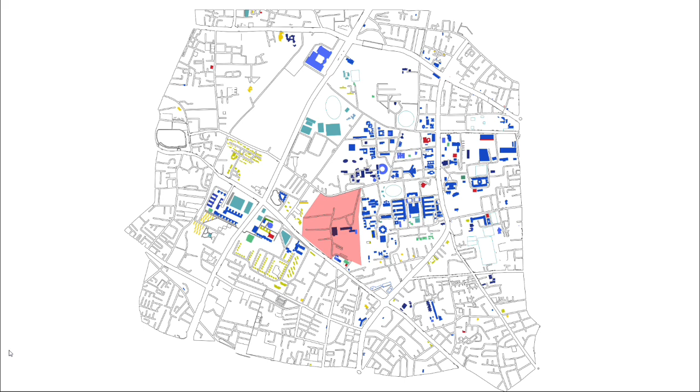Activity matrix and a general study of major institutes and universities in Ahmedabad revealed their interlinked history with the evolution of the city itself. Each of these institutions played a major role to develop an academic groundwork for their respective subjects and pave the way to the development of Ahmedabad as one of the leading hubs of higher education in

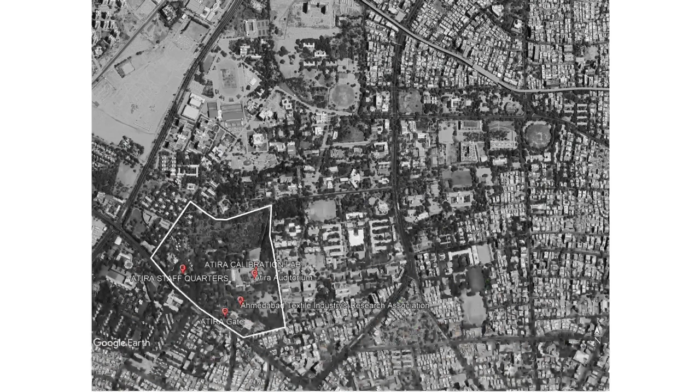India. National institutes like IIMA, NID, and those established by AES, and other institutes like GLS, St. Xavier's College, and PRL, all had significant historical contributions, which in the recent years, scholars and historians have started investigating.

But to access this essential database, a lack of formal archive program of institutional archives within their framework has come to light. While some institutions do have formal archives within the campus, others have an off campus establishment. The rest either have informal archives as a subset of their libraries or currently do not have an archive

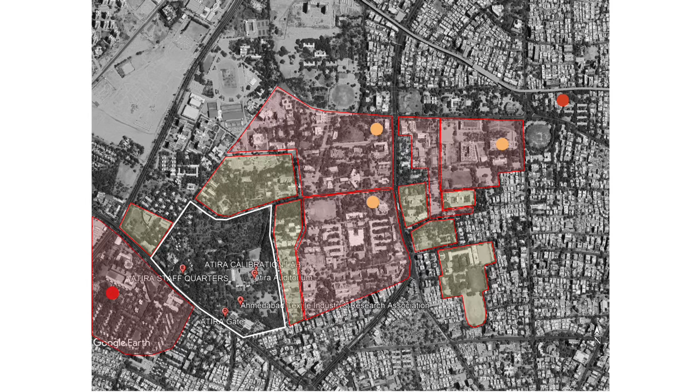program. Addressing this lack of archives and institutional archives as a critical program that records each of the academic achievements and contributions, the University Consortium Archives is proposed. It provides independent archival space to the various institutions with a larger shared space within the University Consortium Park.

This shared nature of the spaces and facilities further promotes investigation into their collective shared histories, forming a larger historical academic landscape of Ahmedabad. This allows us to further understand how Ahmedabad evolved from the post colonial nation building efforts all the way to what it is today.

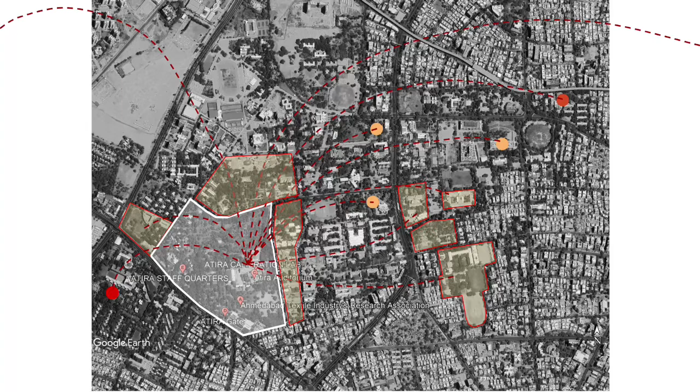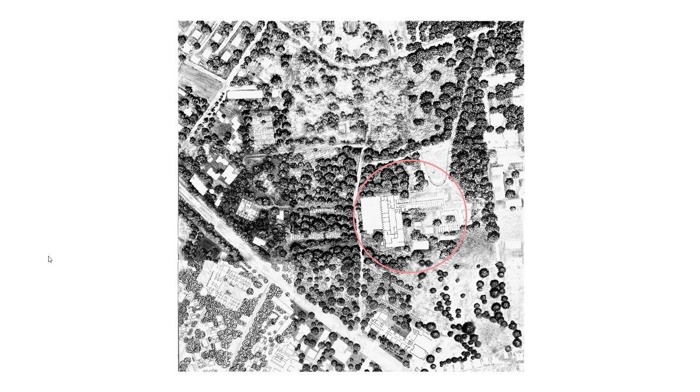ATIRA. ATIRA was conceived as one of such post-colonial institutions in an effort to strengthen the booming Ahmedabad textile industry. Located at the heart of the campus, the ATIRA complex, completed by Achyut Kanvinde, was designed as a modern icon. Influenced by the Bauhaus and the international style, the original complex is made of pure rectangular forms like objects on

a huge site. Playing with these forms, the facade from the northern approach expresses the frame system and horizontal strip windows to break the scale, with fins on the western facade responding to the harsh climate of Ahmedabad.

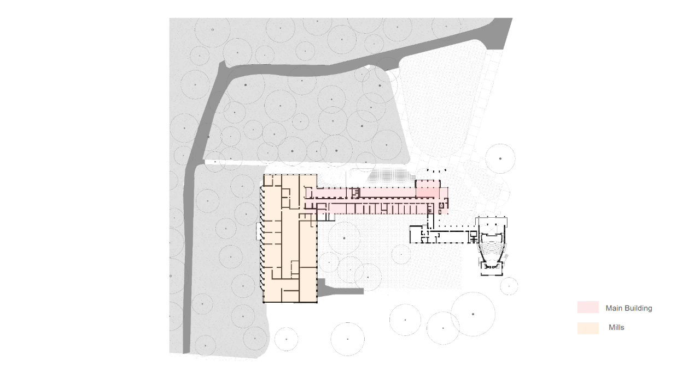The original plan of the ATIRA complex includes three major blocks. The main building with the formal reception to the complex, the mills which house the large machinery for the research institute, and the auditorium with a separate access connected to the main building by the canteen.

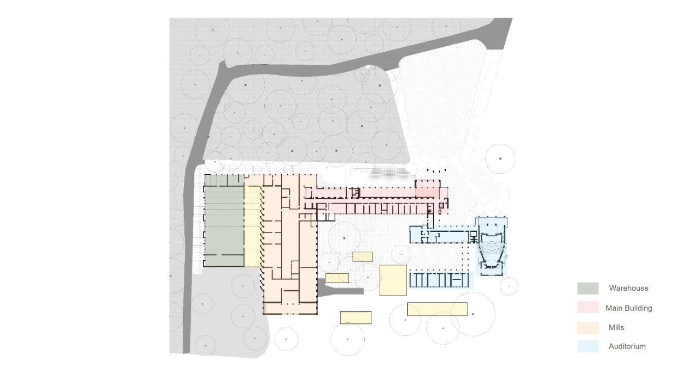An additional structure for the labs and an extension bay for the mills was subsequently added. With time, a warehouse was added as an extension to the mills. Additional lightweight structures have been added with no regard to the original order to meet growing requirements of the institute.

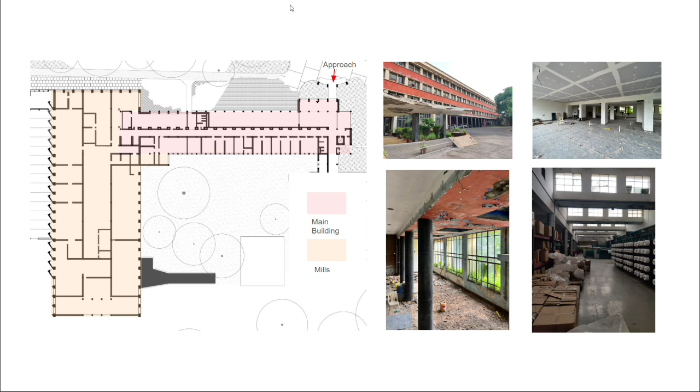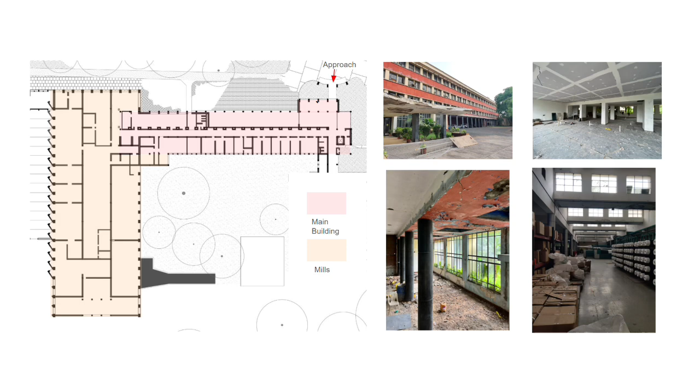Among these structures, the RCC frame structure of the main building and the mills allow flexibility to play with larger connected spans that can cater to the massive space requirements of the UCA. Archives of different natures can be housed within the 22 feet wide grid of the main building and the 12 feet grid of the mills. The nature of this proposed University Consortium Archives further perfectly complements the historic significance of the modernist structure.

The warehouse, with the 24-meter spanning truss roof, is repurposed as an exhibition space that allows for flexible spaces, allowing a periodic dissemination of the curated institutional history stored in the archives, along with various exhibitions from other programs within the University Consortium Park.

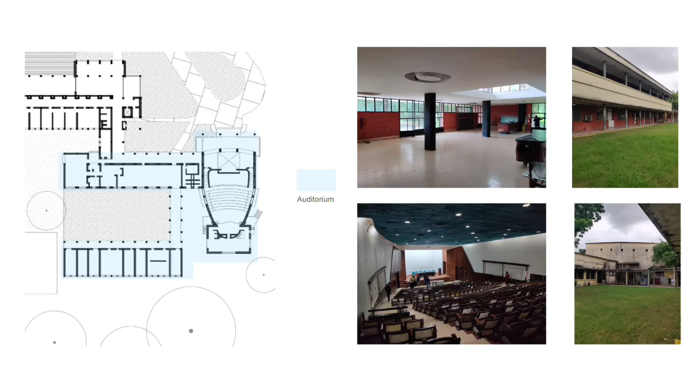The existing auditorium space with the cafeteria is barely integrated with the current programs of the rest of the complex. With the aid of the proposed public nature of the UCA, Kanvinde's auditorium gets a second opportunity to reestablish itself as a civic institution in the university area.

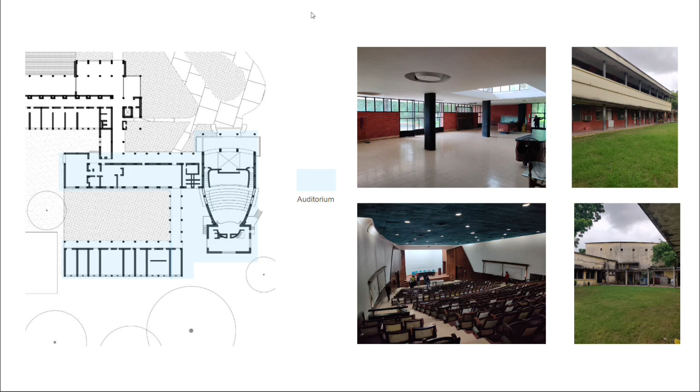General critique. The iconic north facade of the ATIRA complex till date is honored as the main facade of the campus that caters to the original circulation in the campus, that is north-south oriented. Whereas the south facade has been clearly treated as a back face, with access only through other structures, where these structures are added like scattered blocks on available land at the time of need.

The elevation of the extension warehouse that faces the original circulation too has been curated to continue the language of the elevation of the mills, while the back elevation of the same has not been given any consideration.

While the north approach ties the ATIRA complex to the campus, the secluded approach of the auditorium and its receded position makes it appear to be an ad hoc function to the complex, rather than a celebrated and integrated part of it.

The existing location of the auditorium, even though it is immediate to the main multi-storied building, accompanied by a garden as a means to gather before and after events, there's a lack of formal connection that acknowledges and celebrates each other's presence.

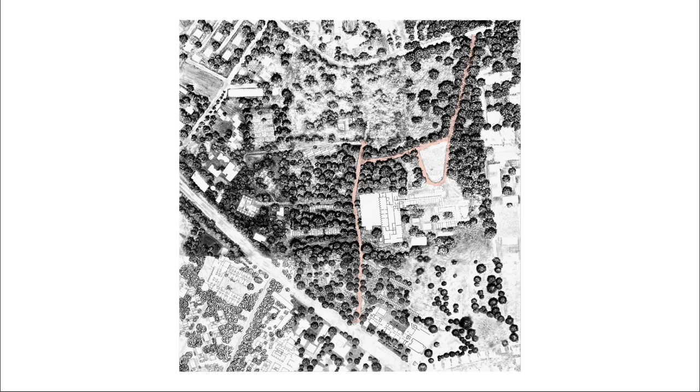Even though a residential access was opened up that makes the ATIRA campus a two-faced campus, the same treatment to both facades, however, is not followed up in the building design. By discarding this old circulation, it allows circulation in the campus to flip the order of the campus.

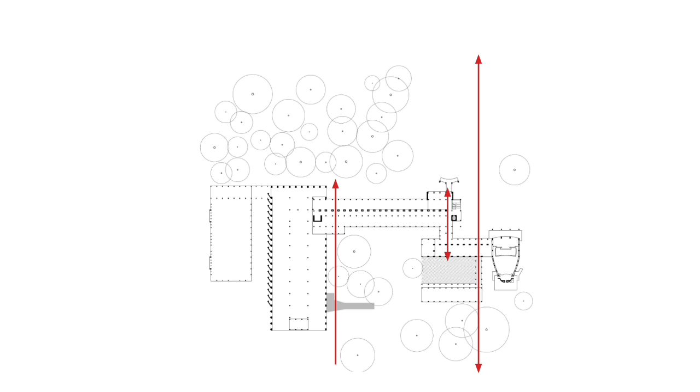Similarly, by discarding the old circulation of the buildings of the ATIRA complex and looking at new circulation possibilities suggested only by the structural members, four nodes reveal themselves at the intersections, two suggesting a south approach and two suggesting both a north and south approach, enclosing the plaza, which becomes the new datum of the complex.

These nodes connect to an overall campus circulation through a south to north pedestrian path from the CRC and vehicular access near the auditorium drop off from the south and north respectively. The University Consortium Archives, thus, at the core of the campus, binds the academia, research, and production both programmatically and through circulation, with wilderness omnipresent in its backdrop. Hence, the role of the previous anchor of campus is written back to Kanvinde's ATIRA complex.